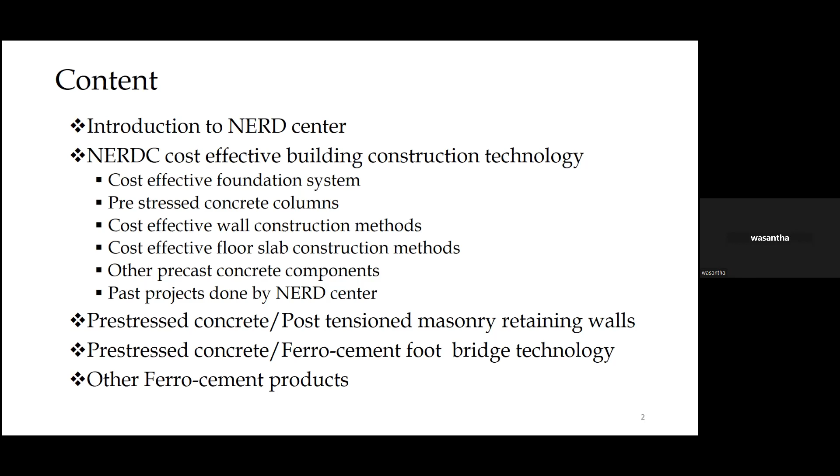Other ferrocement products - shall we move one by one? NERD Center, it is commonly known as NERD Center, but its full name is National Engineering Research and Development Center of Sri Lanka. It was established in 1974 by Industrial Corporation Act, and is presently located at Industrial Estate, Ekala, Ja-Ela.

Our total workforce, including skilled and unskilled laborers, is around 300, and we have nearly 40 plus engineers in all disciplines of engineering. We are now under the Ministry of Education.

We move on to cost-effective building construction technology. We have an entire system with introduced alternatives, and some of these techniques were introduced by late Dr. A.N.S. Kulasinghe, who was the chairman at NERD in its beginning. After that, some engineers who joined NERD Center added more technologies.

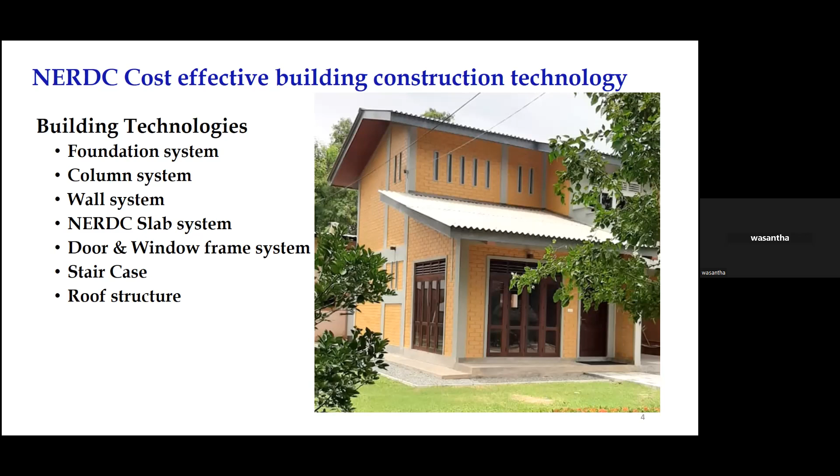As an alternative, we introduce a small plinth beam resting on the ground and spanning between columns. Above that, we construct a plinth wall made out of cement and quarry dust mix, in a 1:10 ratio. You can make up the difference between the existing ground level and the finished floor level with this slip-form plinth wall and plinth beam. This is the foundation we introduced.

The size of the plinth beam varies depending on the ground condition and the load of the wall, etc.

This is the drawing of a foundation. You can see this foundation plinth beam rests on these two columns and it is supported by the ground. In this case, it is 4-inch height. We construct a plinth wall on top of that with cement and quarry dust to make the relevant floor level height. This is the foundation we are talking about. Then we don't need excavation in this area between two columns. We can eliminate excavation.

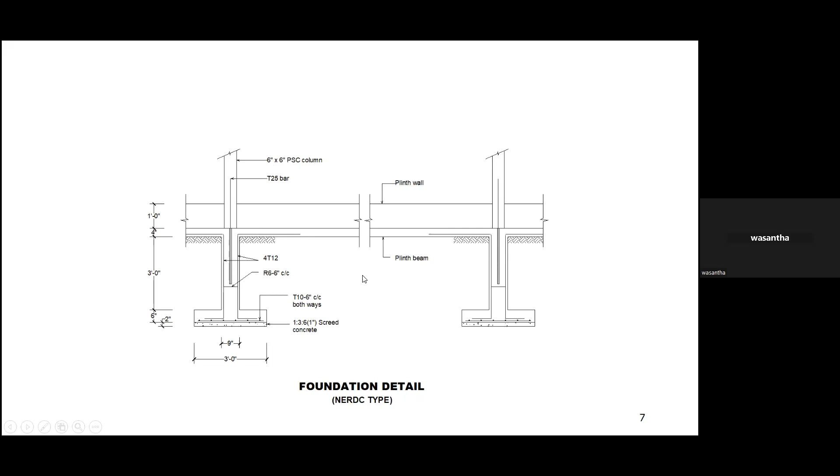These are some pictures of the foundation. This is a small building. This is another one. For this plinth beam, you can introduce a reinforced concrete beam as well. If you consider the uneven settlement, etc., you can design for that. And the same thing we can use for the foundation, and you can construct the plinth wall on top of that.

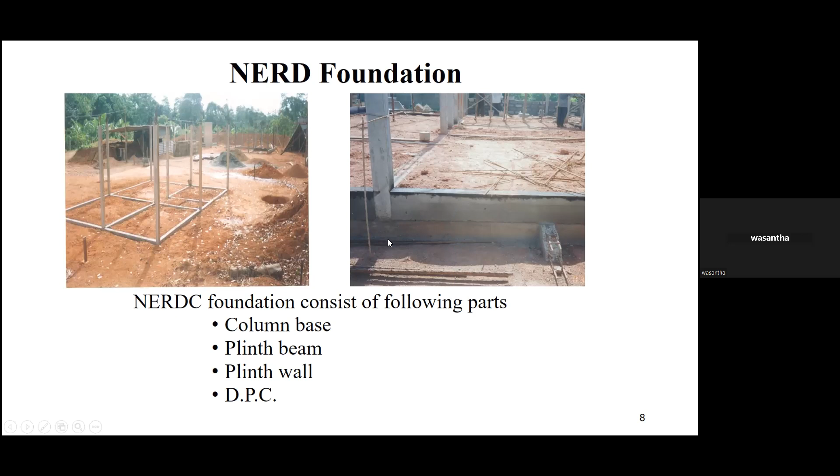This is the foundation introduced by NERD Center, and these are some pictures. This is a column excavation and you can see the reinforcement ready for the plinth beam. This is how we put the plinth beam. Here we have used 2 numbers of reinforcement, and on top of that, this is the plinth beam. On top of that, we construct the plinth wall. This is reinforced concrete. This is 1:10 cement and quarry dust wall, we call it plinth wall.

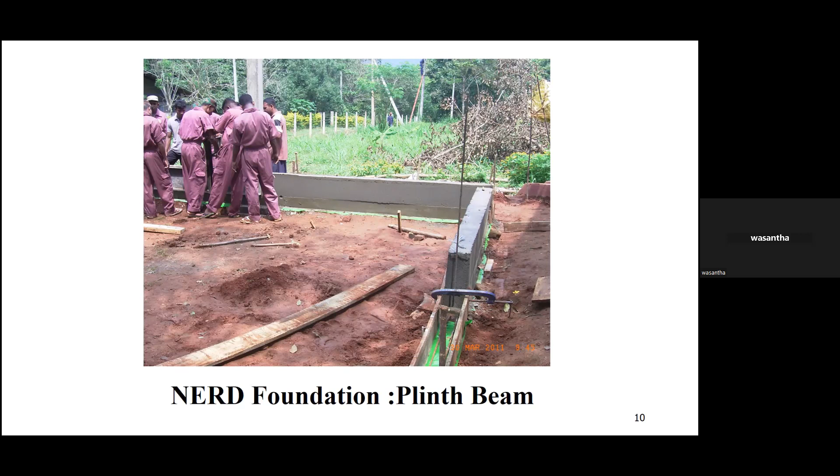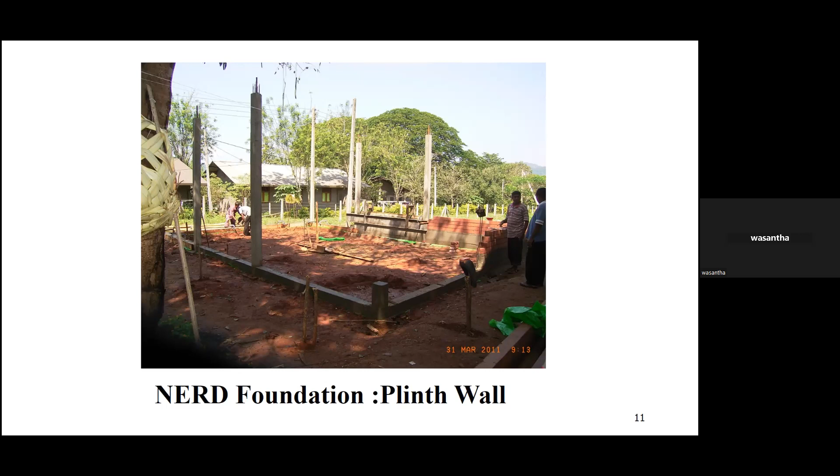This is a foundation during construction. The limitation of this foundation is you can go up to a maximum of 1.5 feet. That means if the level difference between the existing ground level and the finished floor level is more than 1.5 feet, you have to go for the traditional technology, because this slip form plinth wall cannot resist the lateral force given by the soil.

Instead of traditional reinforced concrete columns, we have introduced pre-stressed concrete columns. Actually, these columns are not fully pre-stressed, they are partially pre-stressed. These columns are made out of grade 40 concrete. If you are using pre-stressing, the minimum grade you can use is grade 40 - it is given in the code as well, the BS code. We produce columns of sections 4 by 4 inches, 5 by 5, 6 by 6, and 8 by 8.

We can produce even bigger sections, but the problem is handling is difficult. Most of these precast concrete components we handle with manual labor. These 6 by 6 columns we can erect with the help of 5 or 6 laborers easily. If you use a boom truck or excavator, you can erect even 40-50 columns within a day.

These columns have connection arrangements - connection to the foundation and connection to the next level column. I will show you by pictures. These are the connecting arrangements. In one column at the top, we put this 25 millimeter tor steel bar. In the other column, we put a 32 millimeter GI pipe, and we fill this GI pipe with cement paste and fix the column. This is the fixing arrangement at foundation level.

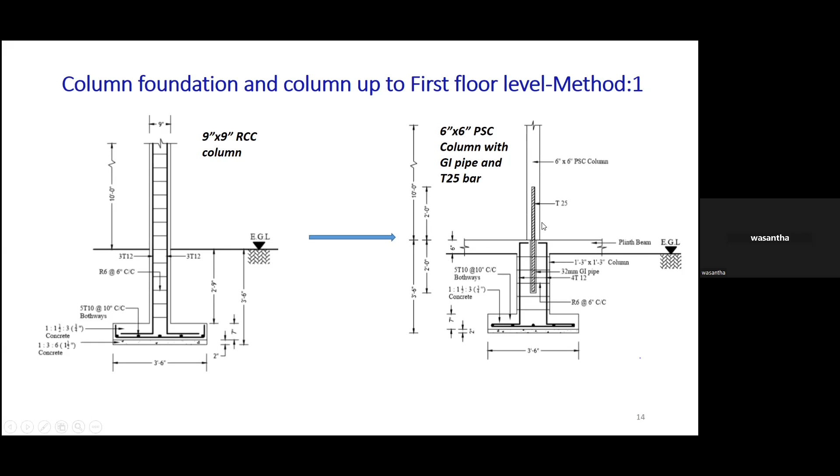This is one method. This method is suitable if the ground level is not flat. You can make all the columns up to ground level with this in-situ column, and you can fix the prestressed column on top of that. Then you can eliminate the ground differences. But this is a little expensive because of this 25 millimeter tor steel bar - tor steel is very expensive. So this method is more expensive than method 2.

This is method 2. Here we don't use this tor steel bar. What we do is we cast the in-situ concrete base and we place the prestressed column on the base like that. This is the prestressed column.

It is on the base, and we concreted it using reinforcement coming from the base like normal column and shear links, and we insert the prestressed concrete column, and concrete this stub column.

This is method 2. Depending on the site condition, you can use either method and do the construction. This column, 6x6 columns, can withstand axially near 225 kilonewtons,

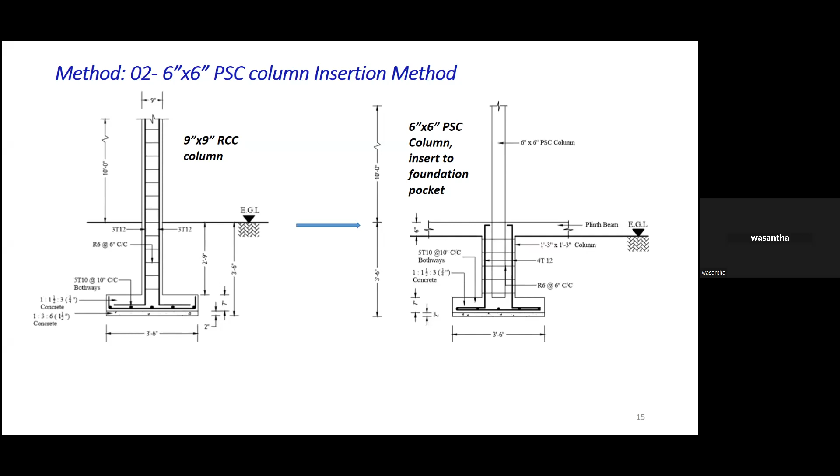and 8x8 column can withstand 400 kilonewtons. These 4x4 and 5x5 columns are used for small single-story construction, small water tanks, etc. If your loads are higher, you can go for higher sections, but the problem is handling. If you have machineries, then you can manufacture columns with higher sections.

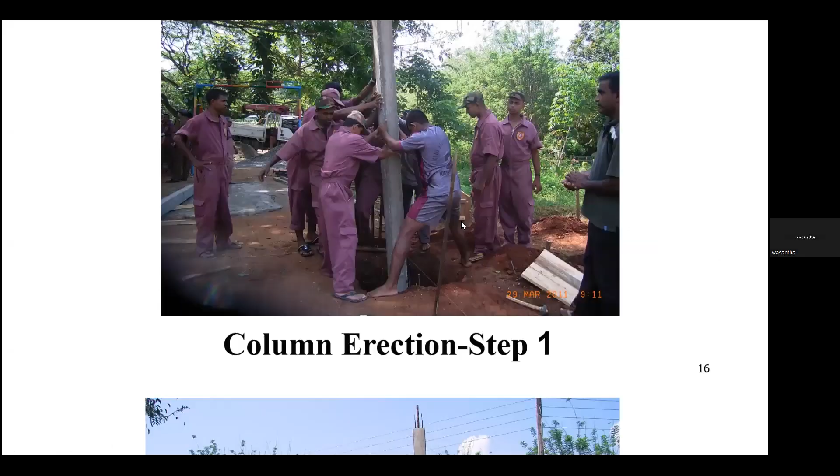This is the column erection. We make the concrete footing and put the reinforcement for stub column and place the column in line and in vertical way. Then fix some support, and you can concrete using this formwork.

Then following day, you can remove the formwork and the column is completed. Like that, you can erect all the columns of a building within one day. And these columns are cheaper, over 30% cheaper than the traditional RCC column.

Since these columns are manufactured at a prestressing yard with good supervision, the quality of the column is high. When we do construction at site, there is no supervision most of the time, and there are honeycombs and verticality issues. There are a lot of issues. You can eliminate most of these issues with these columns, and these columns are durable because they are all made out of grade 40 concrete. Normally we use grade 25 or grade 20 for RCC construction.

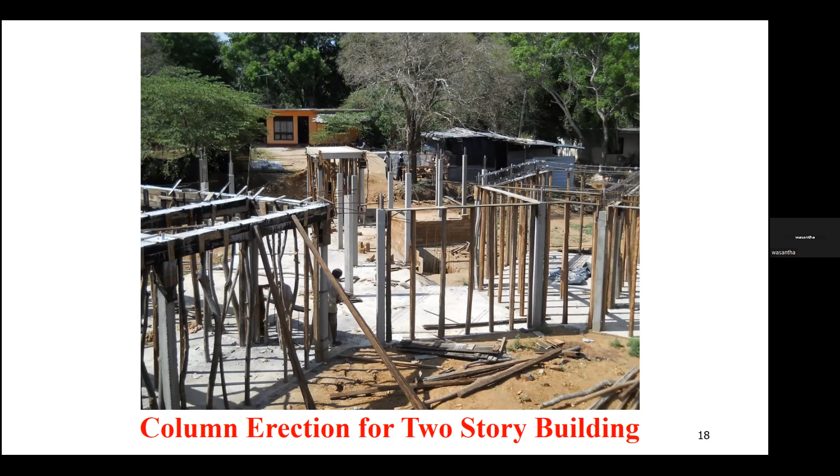And cost-effective wall construction methods. NERD Center introduced 2 wall construction methods at commercial level. There is another construction method not yet introduced to the commercial level. I discuss only the commercially available technologies.

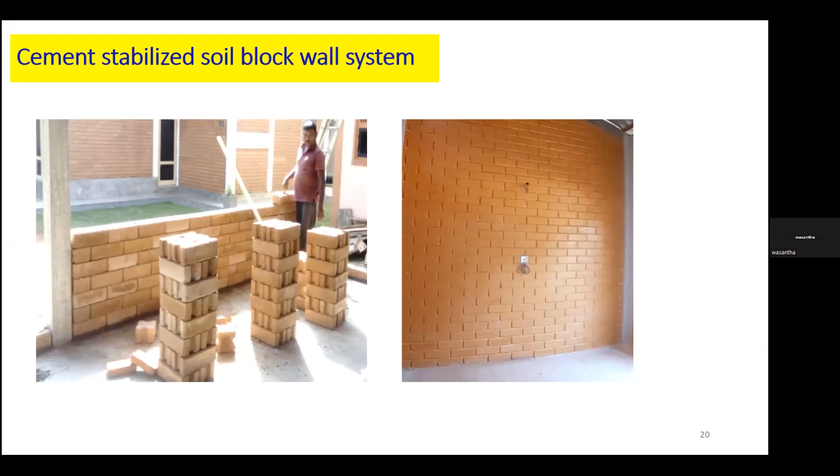The first thing is cement stabilized soil block. There is an SLS standard also for this block. The advantage of this wall construction system is it uses minimum amount of sand, sometimes no sand. In this soil block wall, no sand is used, only soil is used, and these are interlocking blocks. Then you don't need mortar to make the wall as well.

First thing is you have to select a good soil. For this soil block manufacturing, mainly you need gravel soil. If your soil contains more than 60% of coarse sand and gravel, and content of silt and clay is less than 40%, that type of soil is suitable for manufacturing cement soil blocks.

You can use a simple test, this bottle test. What you have to do is put the soil sample at half level of the bottle and shake it well and keep it to settle for 24 hours. Following day, you can see at the bottom the gravel, above that the coarse sand, silt, clay, and water. Then you can measure the height of these individual layers and calculate the percentage.

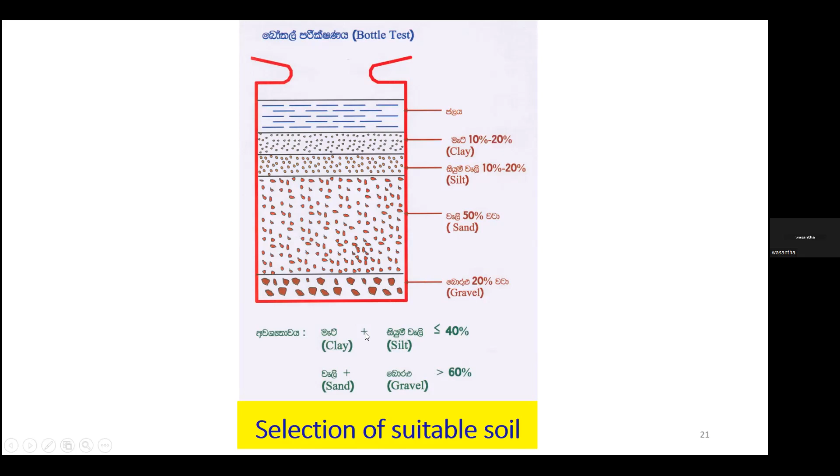If it satisfies this equation, then that means this soil is suitable for manufacturing cement soil blocks. Normally, simply gravel soil is suitable. For clay particle size distribution, clay is what we consider less than 0.002 millimeter, silt between 0.002 to 0.075, sand 0.075 to 5, gravel 5 to 10.

To manufacture these soil blocks, we have to sieve this gravel soil. We have to sieve using a 6 millimeter sieve. That means if the particle size is more than 6 millimeter, the finishing is not good enough. These are manual, normal sieving methods, and there are some mechanical methods also.

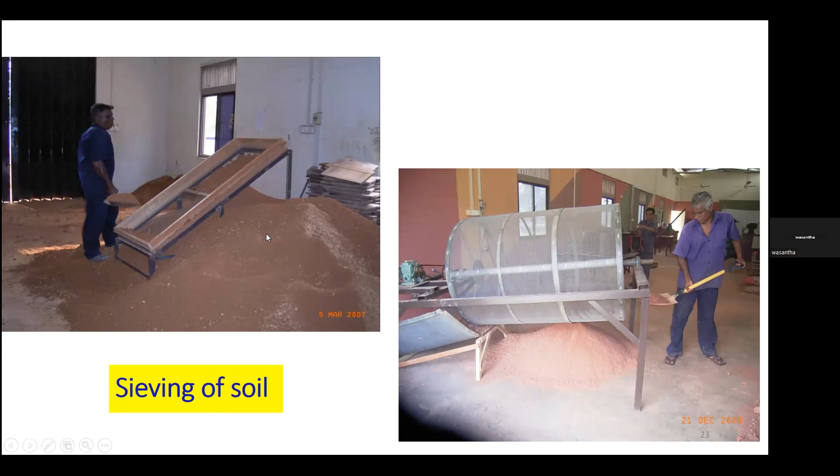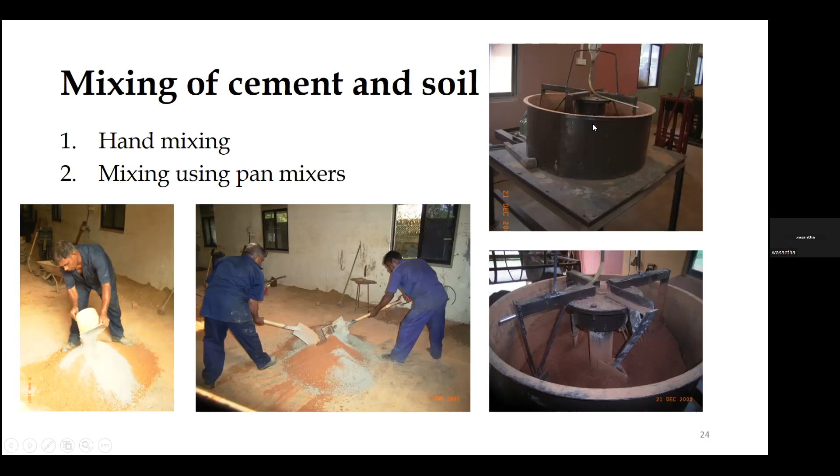You can use either method and prepare your soil, and you have to mix it with cement. Normally, there are 2 machines. We use 1:10 to 1:15 ratio. These are manual methods of mixing and automated methods also. You can use either method.

And when you are adding water, you have to be careful. You can't add water like cement, sand mortar. We use this flower bucket to add water and mix well. Otherwise, it will not properly mix.

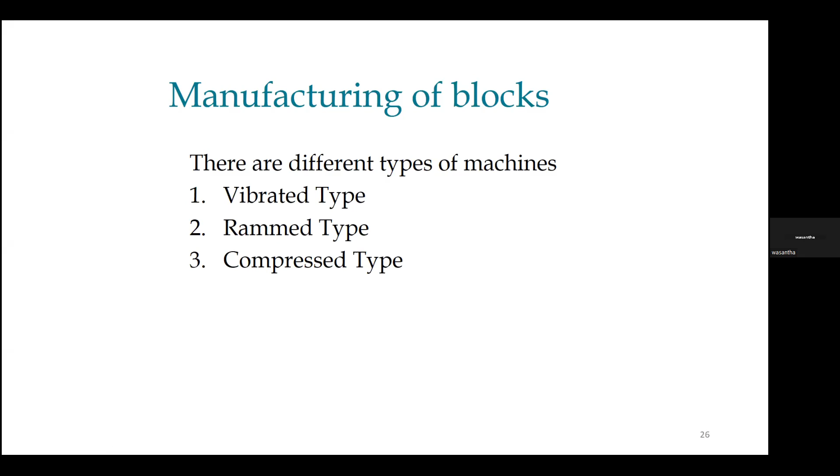And then you have to manufacture the block. There are different types of machines we have introduced. Vibrated type means the normal block making machine. Rammed type machines are specially introduced for manufacturing of these blocks, and compressed type blocks.

This is a normal block making machine. You can produce blocks, but the problem is the finish is not sufficient to keep it exposed. You need to plaster it, but still it is cheaper because sand or quarry dust is replaced by soil. Since soil is cheaper than sand, these blocks are cheaper.

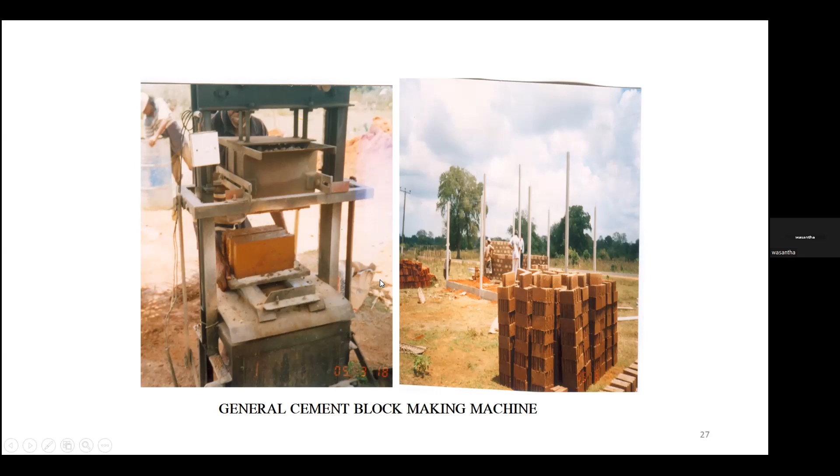We introduced this system for the North and East housing rehabilitation project. This is one model house constructed near Omanthai. This is in 2005, I think.

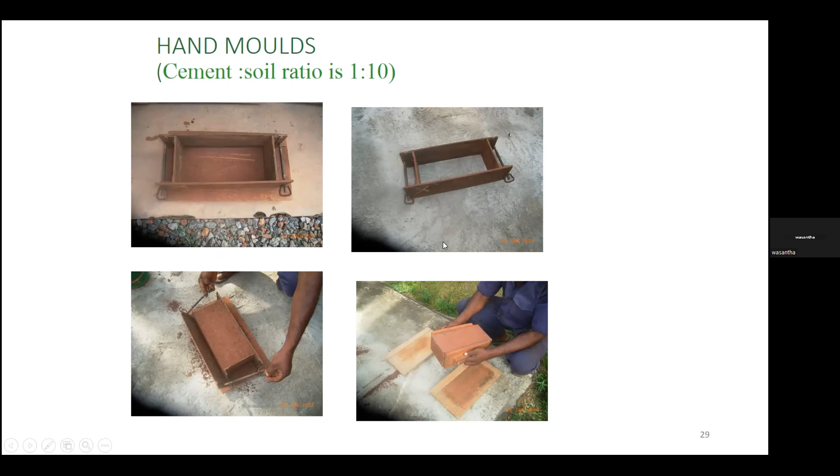Using these hand molds also, you can manufacture these cement soil blocks. You have to use a 1:10 ratio because the compaction is low compared to hydraulic machines. If you have your own construction, you can use this type of hand mold. This is another type - two C channels and timber dividers - and using this equipment you can manufacture soil blocks easily.

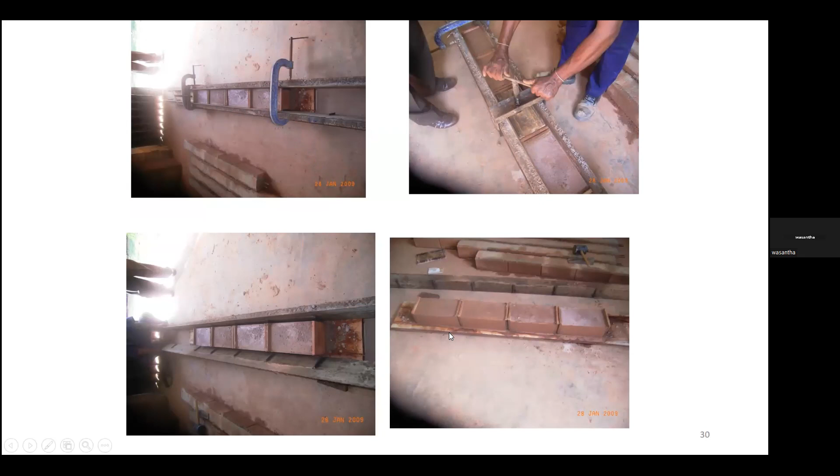There are some compressed type machines. We have introduced some machines. You don't need electricity for this type of machine. We can produce 300 to 500 blocks per day. Plastering is not necessary - blocks have a good finish, only manpower is required.

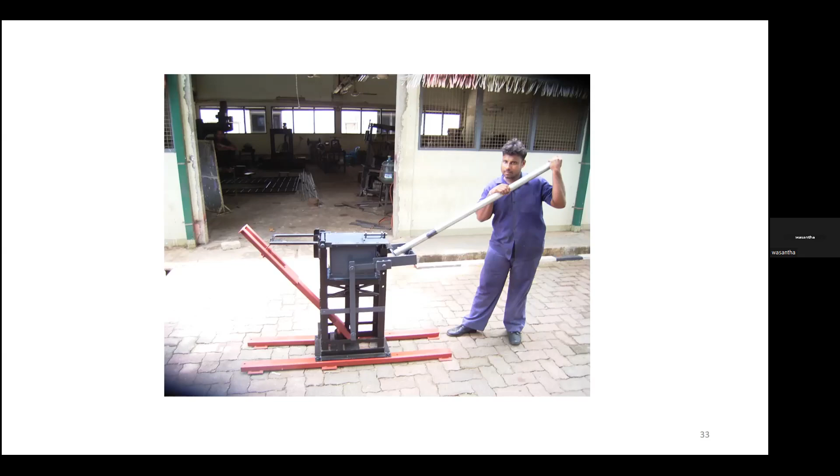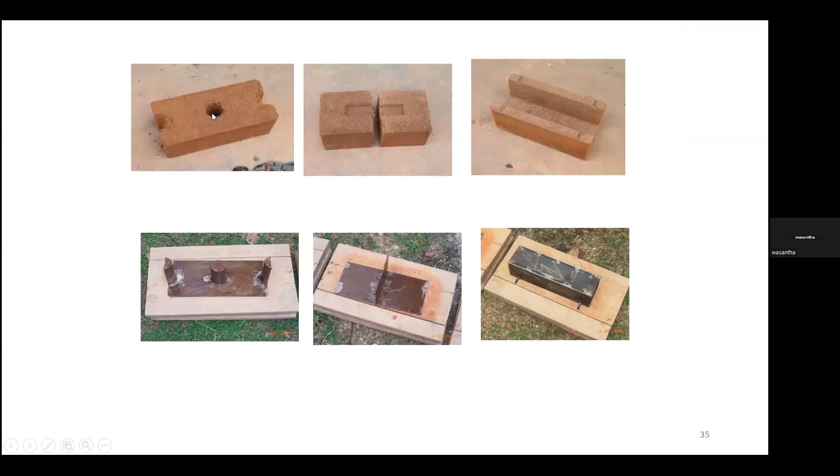If you wish to manufacture soil blocks as a business, the best thing is to go for a hydraulically operated compressed block making machine. Then you can use the cement-soil ratio of 1:15 - earlier machines you had to use 1:10, but now with this machine's high compression ratio, you can use 1:15, which is cheaper. With this machine, 180 blocks can be manufactured per hour, and the finish of the block is very good.

Easy operation - 2 blocks can be produced at a time. This is the machine. We have 10 to 15 registered manufacturers all over the island. Some manufacturers have the capacity to fabricate 5,000 blocks per day - Lanka Ecobricks and several others have such capacity.

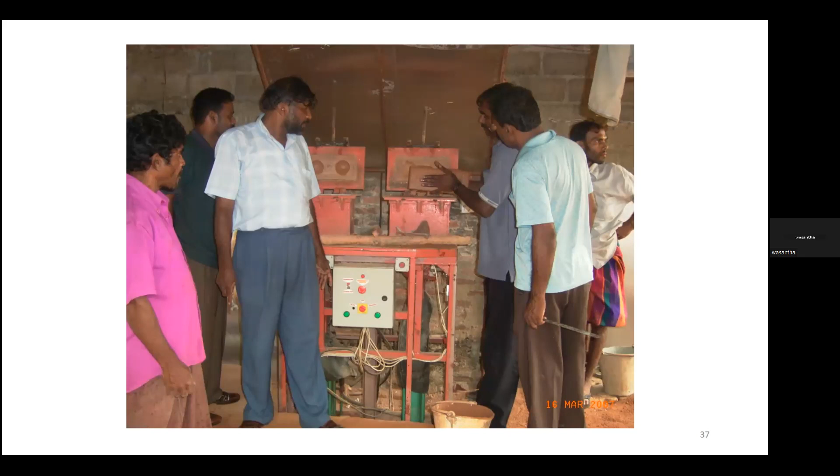This is one of our registered yards. They have enough stocks. Nowadays the construction industry has some problems, and they are also facing the problem of selling these blocks.

This is a house constructed by the owners - they manufactured the blocks and constructed their own house. This is another house with soil block.

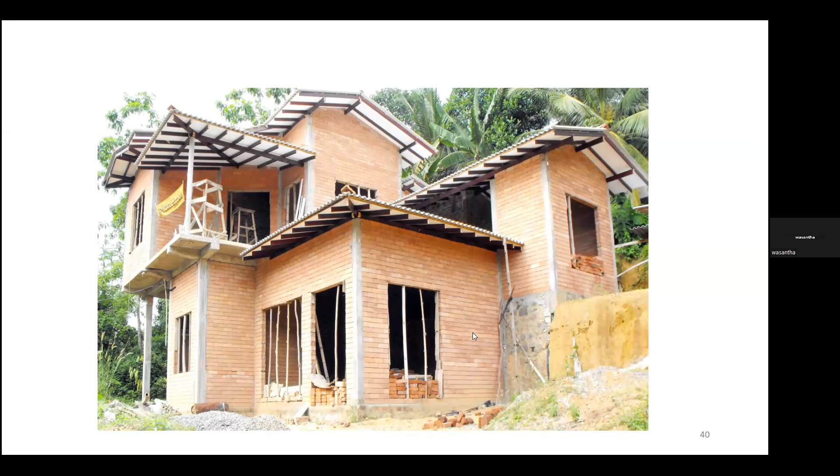This is the building at NERD Center, our business development center. There are some model houses also constructed at NERD Center. If anybody wants to have a look at these houses, there are a few model houses there. Anybody can come on a weekday and visit these buildings.

Advantages: these blocks don't need sand, so it's a solution for the sand crisis and environmentally friendly because sand mining is minimized. Soil is freely available, with less transport problem compared to sand. There's also a comfortable environment inside the house because heat transfer through this soil block is minimum.

The technology is simple. A significant amount of cost can be saved, and it will create new employment.

The next wall system is the slip form wall. This was introduced by Dr. Kulasinghe in the 1980s. At the time of introducing it, quarry dust material was a waste from the quarries. Then he introduced this wall construction method. This is actually a load-bearing wall.

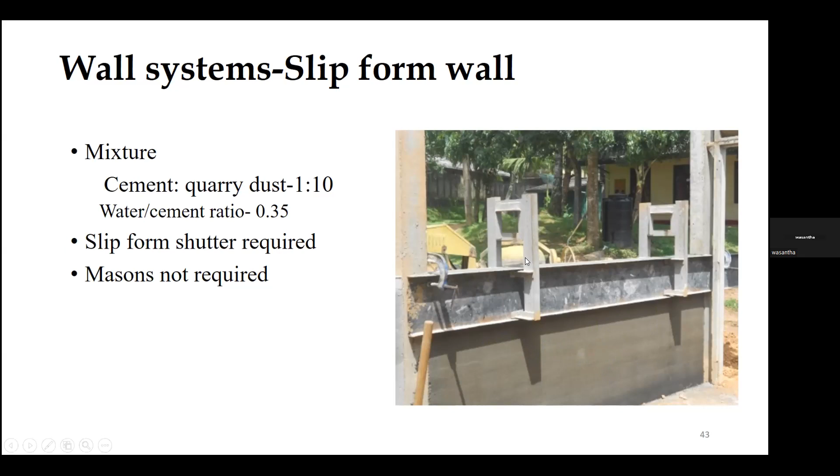You don't need a mason to construct this wall - here you need the slip form shutter. Slip form means this shutter is made out of steel, and there are two brackets like that. The shutter is put at the bottom like that, and we fill the inside with a cement and quarry dust mix at 1:10.

Using this ram, we compact it. Using these two hydraulic jacks, we place the jack here and lift the shutter, then fill the shutter again, compact again, and lift again - like that, you can continue the wall up to the top.

This allows continuous construction - you don't need to wait after constructing 5 feet like that. You can complete the wall even if your wall height is 15 feet, it doesn't matter, you can continuously construct. If there are openings, like a window or door, you have to keep the frame inside the shutter, and follow the same procedure on both sides.

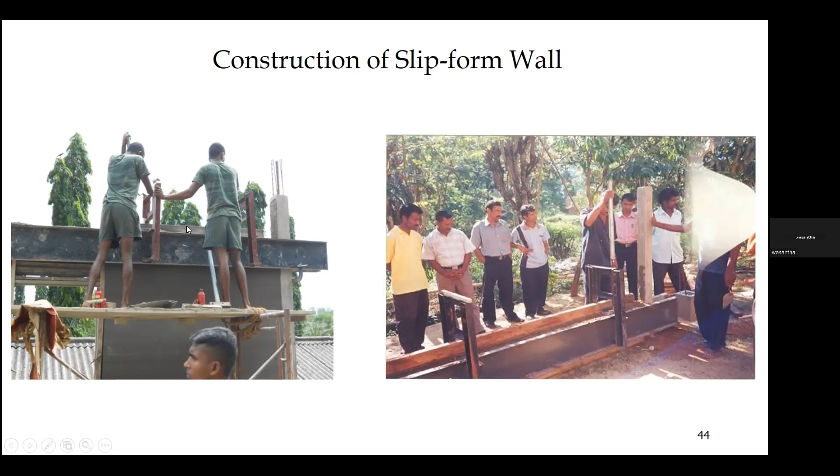Then you can do it like this. Here you can see the window frame is placed, and the two sides we fill with this mix. And if you need the lintel, you can cast the lintel with the same shutter. Like that, you can complete the construction at the top. If you need a tie beam or something, you can cast the tie beam using the same shutter, and the following day you can remove the shutter.

The advantage of this one is this is not a block by block making method. The entire wall is like a single block. Then you don't need to plaster. You can directly apply lime putty or skim coat or something. You can apply and get a smooth finish, like a finished plastered wall. And that is for the inside. Outside, you can just directly apply the weather shield paint and this filler or waterproofing seal or something.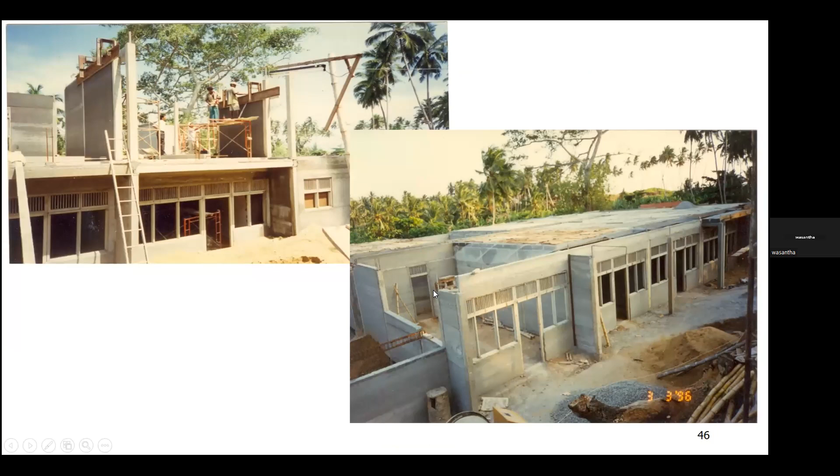Then in this one also no sand is used. The earlier one is cement and soil. This one is cement and quarry dust. In both these wall construction methods, you don't need plastering. That means with this wall construction method, we have eliminated plastering. You can save sand. These are some buildings we have constructed. But nowadays, the cost of this quarry dust is a little expensive, but still it is cheaper than the sand, and still this technology is viable. We will use this technology still in our projects.

And in slab construction also we have introduced some technique. It was introduced by Dr. Kulasinghe and later modified by some engineers. With a traditional slab system, if you design an RCC slab and apply the deflection control, the slab thickness is around 5 inch, and you need a lot of formwork and supports and a lot of reinforcement. As an alternative, we have introduced this slab system. Here we use precast concrete beams at 2 by 2 feet interval and a plywood formwork or ferrocement panel and no steel reinforcement, only a 2 by 2 GI mesh and 2-inch thick in-situ concrete topping. Then you can have this type of slab.

It is also cheaper. There are two systems. One is with the plywood. This is a ferrocement panel, a permanent panel. I will explain both. In this system, you have placed precast concrete beams at 2 feet interval and 2-inch thick in-situ concrete topping. These beams are pre-stressed with 3 number of 5 mm high tensile steel wires. Each wire is tensioned to 20 kN and grade 40 concrete is used. For the in-situ concrete topping, we use gauge 10 2 by 2 GI welded mesh.

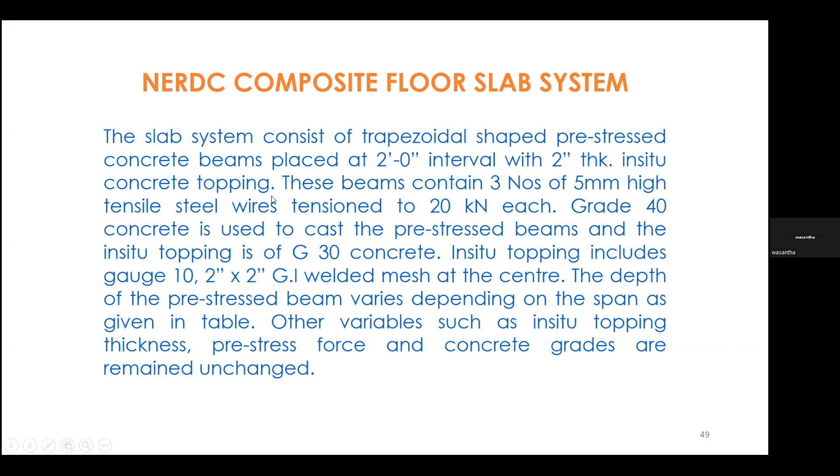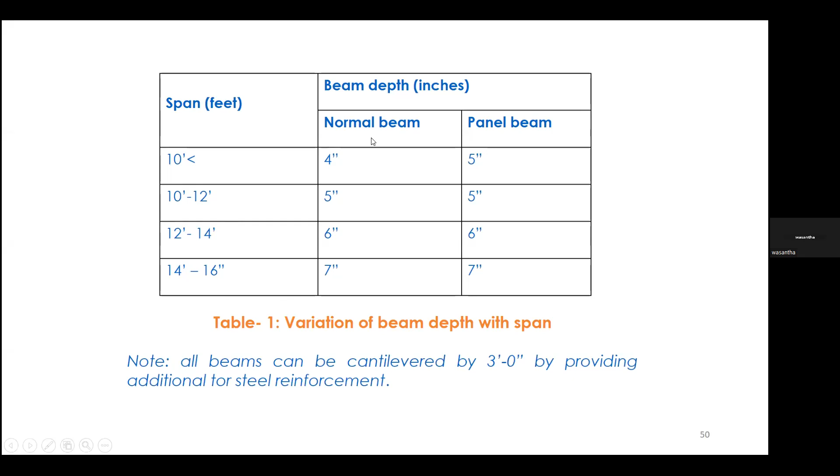And the beam depth varies depending on the span. We have a small mistake. Maximum span you can have with this slab is 16 feet. That means if your panel size is 16 by 100, it doesn't matter. You can have a 7-inch deep beam and you can construct the slab. This is one slab system. Actually, this is the system introduced by Dr. Kulasinghe. These are pre-stressed beams at 2 feet interval. This is the in-situ concrete topping. At the center of the in-situ concrete topping, we have a 2 by 2 GI welded mesh.

But the problem is you need a plywood formwork here. The house owners faced some difficulties in finding this plywood formwork, and later other engineers introduced a ferrocement panel here. The beam is made with a small groove like this, and we place the panel here, and we put the in-situ concrete. This method is easier than the earlier method, but more expensive. In the earlier method, plywood can be reused. This ferrocement panel is a permanent formwork. It cannot be removed after you place the in-situ concrete topping.

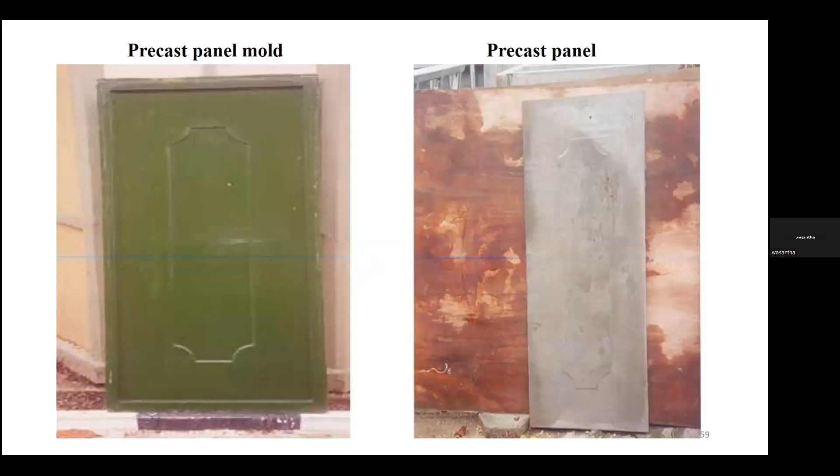These are the two methods introduced by NERD Centre. Actually, this slab is designed in accordance with the clauses and guidelines given in Chapter 5. These are some pictures. These are the beams. This is the in-situ concrete topping. These are the ferrocement panels. We use these fiberglass molds to manufacture these panels. These panels are made out of ferrocement. Ferrocement means cement and sand with some mesh. Here we use gauge 18 1 by 1 inch GI mesh.

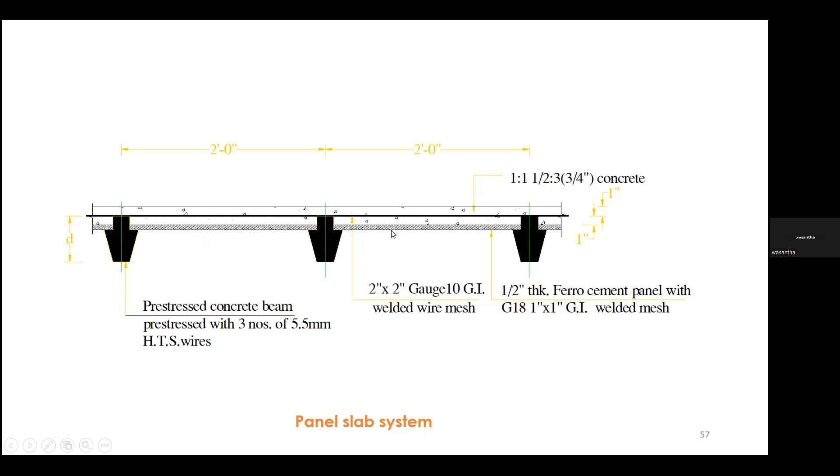This panel is there only to keep the in-situ concrete. This panel is not a structural element. It is a permanent formwork. After the concrete is set, this panel is not required, but we cannot remove it. Then we have a design at the underneath of the panel, so you can have this type of finish. There are some plain panels as well. Advantages of this NERD composite floor slab system: actually, this is a composite system of pre-stressed concrete beams and in-situ concrete topping.

The advantages: considerable reduction in weight. You know, in a 5-inch thick RCC slab, the unit weight is 3 kilonewtons per square meter. In this slab, the self-weight is 1.8 kilonewtons per square meter. So, significant reduction of self-weight.

Then you can reduce the foundation as well, because the self-weight is one of the most significant weights when you consider the foundation. With this reduction, you can reduce the foundation cost as well. Then no propping is required. If you put the normal slab, your props cannot be removed until 28 days.

With this one, since there are no props, the following day you can start the internal finishes of the room. And this is cost effective, it saves material. These are the advantages. Few limitations: this pre-stress technology needs special knowledge. These beams can be supported only in a simply supported manner. And it requires pre-stressed beams.

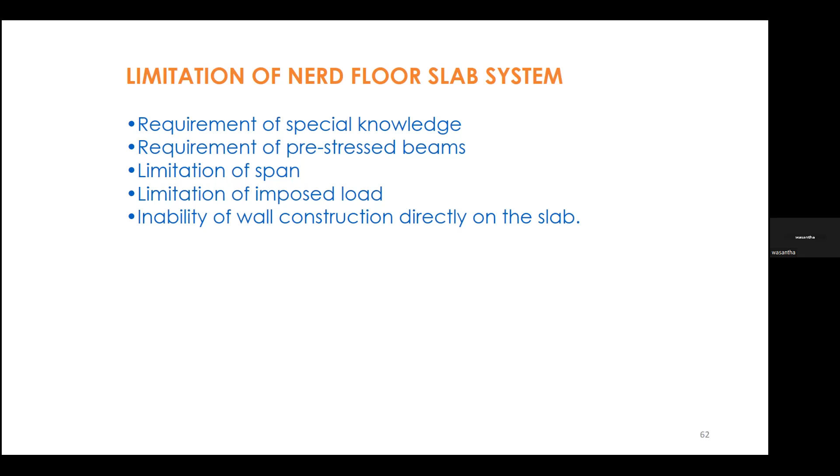Then other precast concrete components. This is very familiar now, concrete door and window frames. First introduced by NERD Centre, now it is very common everywhere, so I won't explain it further. And staircases are very expensive; the labor cost is expensive. We introduced this precast concrete staircase. There are two stringer beams and L-shaped steps. With this arrangement, you can fabricate this type of staircase fully precast, and very cheap, over 40% cost saving.

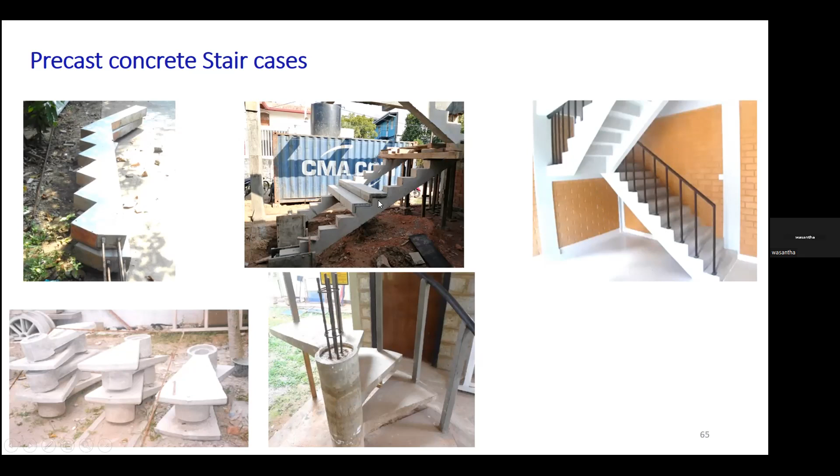And there is a spiral staircase also. This is not good for the main staircase of the building. It is good for a fire exit or as an additional staircase. But the stringer beam and L-shaped steps one is suitable for the main staircase of the building. And we have roof trusses. These are 50% cheaper than steel trusses. The maximum span you can have is 40 feet. These trusses are pre-stressed.

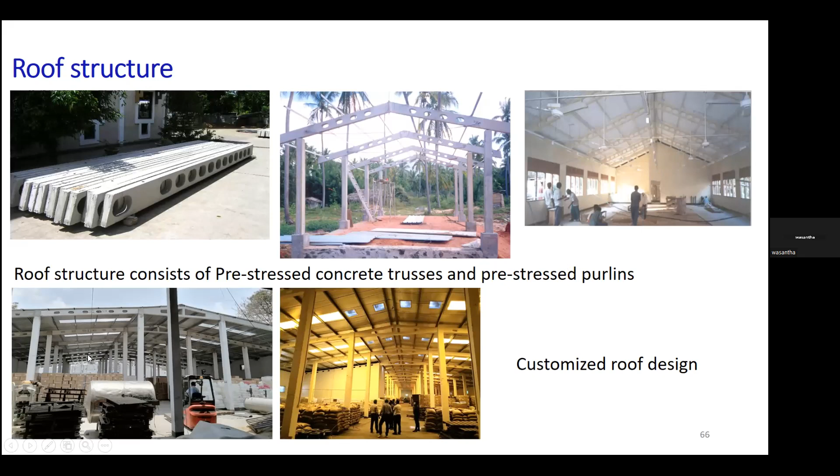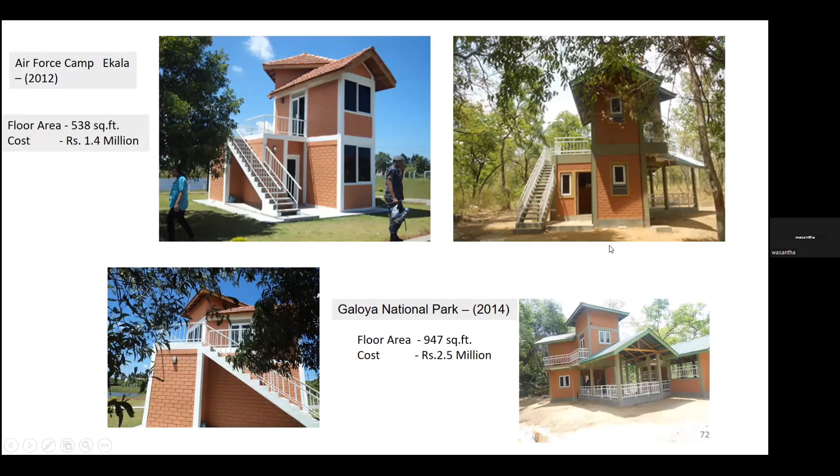And Vidatha centers, we have constructed a lot of Vidatha centers. Almost all Vidatha centers in the country were constructed using that technology: Haliyala, Pannala, Giriyala, Madampe, Hadawata, Sandilipay, Nallur, Sainthamaruthu. This is in the North Province. And this is one building we constructed at Ekala Air Force Camp. This is a National Park quarters building. All our technologies are used here.

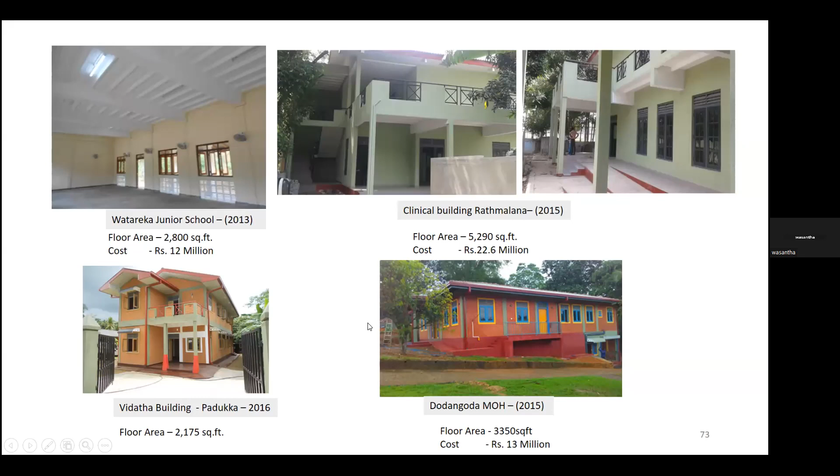And this is another building we completed in 2023, at the Faculty of Indigenous Medicine, Rajagiriya. This is a lecture hall building. Here also we use a combination of normal RCC columns and pre-stressed columns because the lecture hall imposed load is higher. Our pre-stressed concrete columns cannot withstand these loads, so we use in situ concrete columns, and our slab, soil block and roof trusses are used here.

The stringer beam and L-shaped step staircase is also used. Here we completed only up to the third floor because their budget is limited, and the project cost is 69.6 million with price fluctuation. We started this building in 2021 during this crisis, and we completed it recently.

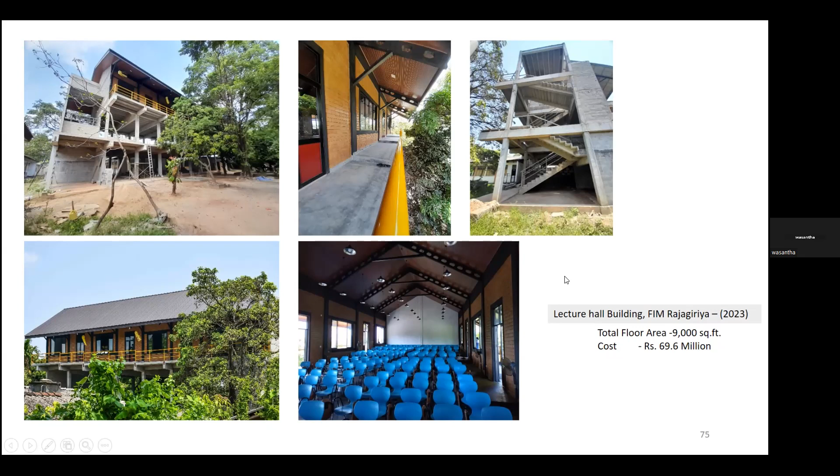And in our estimate, the first estimate was around 47 million, and we ended up with 69 because of this price increase. And now it is handed over as the lecture hall, and lectures are conducted here now.

And we introduced pre-stressed concrete retaining walls instead of traditional retaining walls. Traditional retaining walls are made out of rubble masonry or reinforced concrete masonry. And this is the system we introduced. These pre-stressed concrete wall panels are produced at the pre-stressing yard, and we put the foundation and fix this column vertically. And these columns are pre-stressed so that the lateral soil pressure can be handled by this pre-stressing.

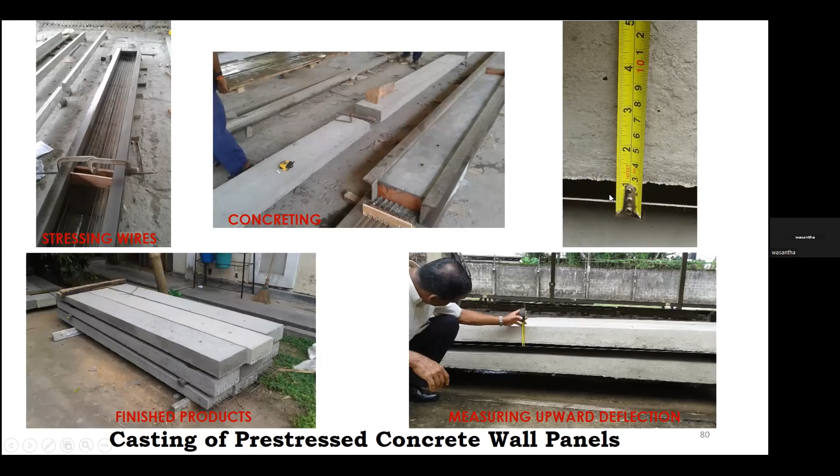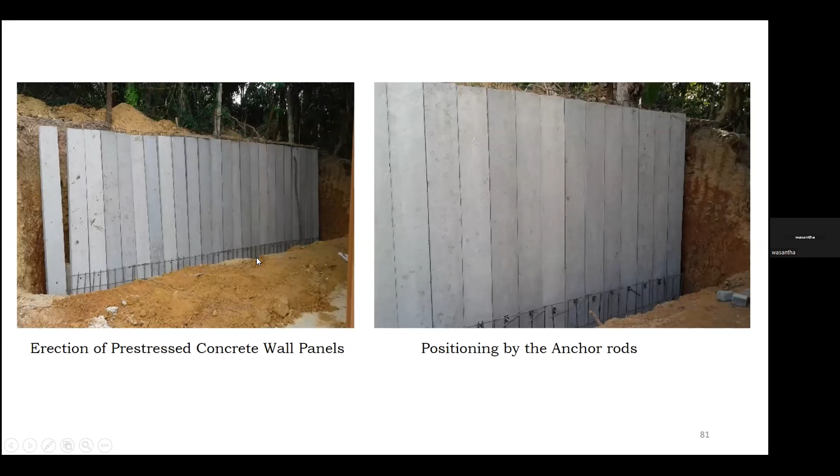And we place the panels, and we fix the panels with this anchor bolt to the in situ concrete wall. You see, it is below the ground level, and keep it vertical and put the formwork and concrete. Like that, we can go up to 12 feet height. The section of this column is very small, I will show. And we fill the top side and bottom side, and we check the deflection also, very small deflection. And durability is very high because pre-stressed concrete is involved.

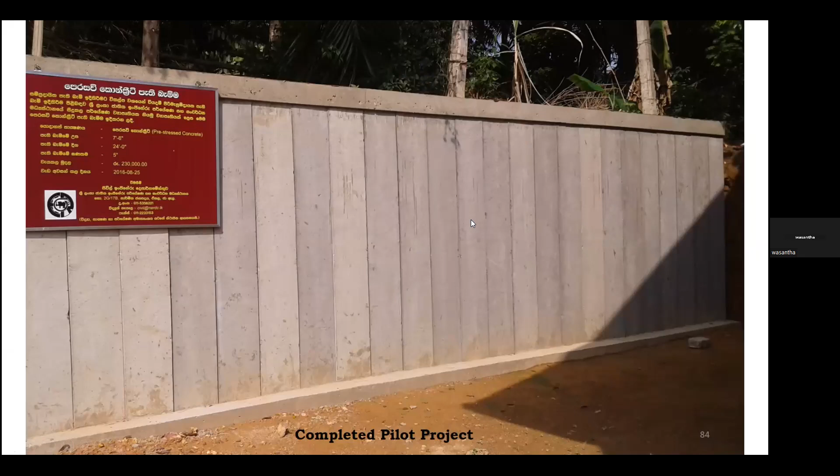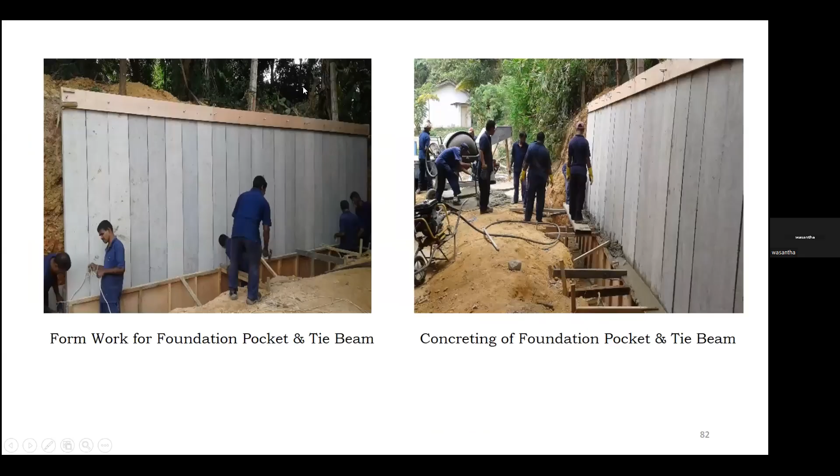This is a completed project. We have completed several projects all over the country with this pre-stressed concrete technology. These are the sections. If your height is 3.3, your panel size is 175 by 300. Here you can see top 3 inch, bottom 5 inch tapered wall panel, because the moment is 0 at the top and maximum at the bottom due to lateral pressure.

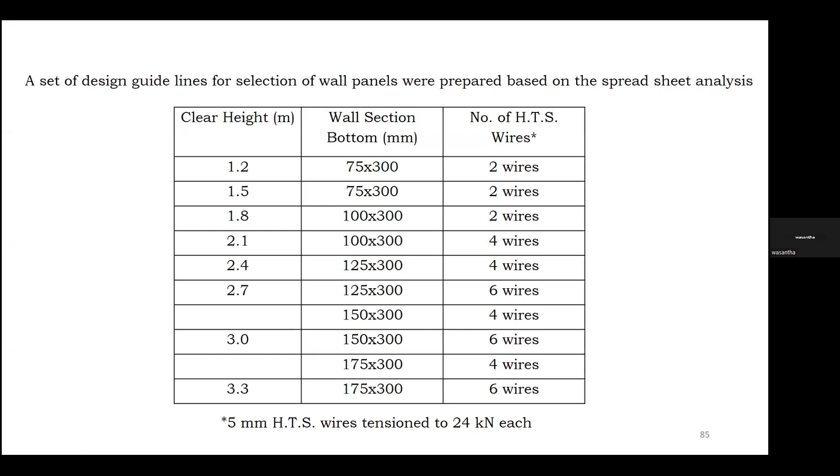And with this one, we cannot reduce cost much because concrete and steel are involved. Minimizing cost is not easy. Then we thought about masonry blocks. The problem is normal masonry blocks cannot be used because they cannot take a lot of compression. Then we have to manufacture special blocks. Normal blocks' compression is low, but if you produce a post-tensioned masonry retaining wall, you need 7 to 8 compressive strength.

Then we can manufacture this post-tensioned masonry retaining wall. We manufacture blocks at NERD. And like the earlier one, we cast the concrete footing and the wall up to ground level. And we kept holes to insert high tensile steel wires for the post-tensioning. This is the arrangement we use for post-tensioning. This is the wall up to ground level. Then we construct the wall on top. With this PVC pipe, we can make vertical holes and horizontal holes. This is to lock the pre-stressing wire.

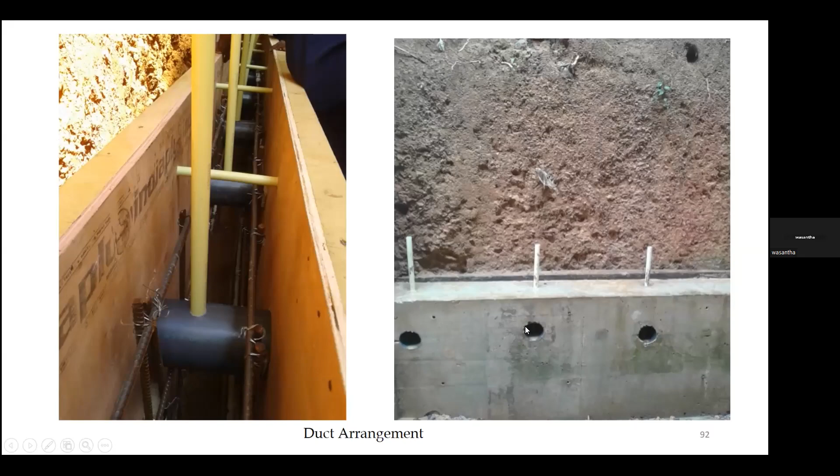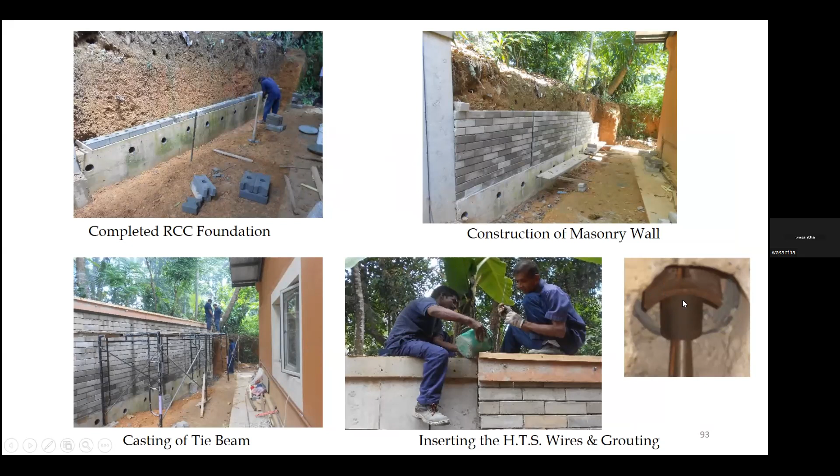And we place the blocks and we construct the wall like that. And after completing the wall, we put the tie beam on top. And there is a small 2-inch diameter hole here. And we insert the high tensile steel wire from the top and put the anchor cone and pin here and fix it like that. And from the top, we can stress the wire using these hydraulic jacks. This is on top of the wall.

And then you can pre-stress this masonry wall eccentrically, because the hole diameter is 2 inches. Then you can keep the pre-stressing wire to a side and stress. And this anchor cone and pin we cover with mortar to avoid corrosion. This one is very cheap.

But we face some problems. Our machine was developed to manufacture cement soil blocks. When we manufacture cement and quarry dust blocks with this machine, the durability of the machine is reduced. That's the problem. We still cannot solve this problem, but the technology is very good, very cheap. With this post-tensioned masonry wall construction method, no concrete is involved above ground. And this is 25 to 30% cheaper than the RCC wall.

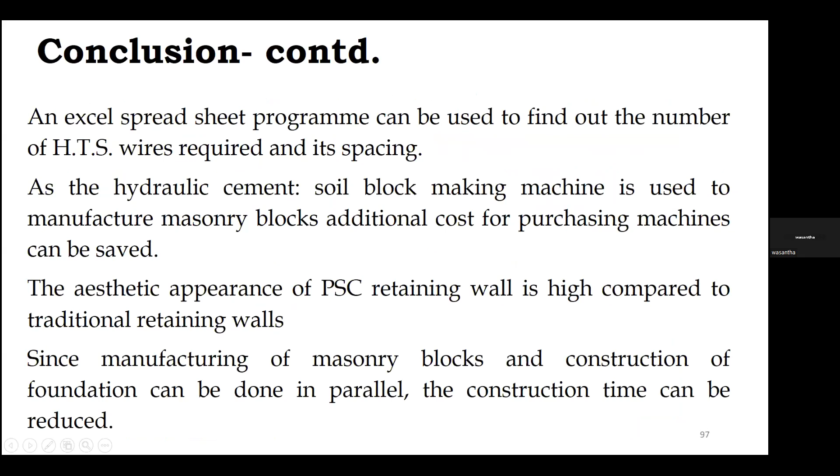This is a completed project. In addition, we have introduced footbridge technology. In Sri Lanka, there are around 5,000 places with unsafe means of crossing canals. In some places, there are no means of crossing canals at all, and they have to cross through the river using timber logs and similar methods. We did a survey in 2007 and identified over 5,000 such places.

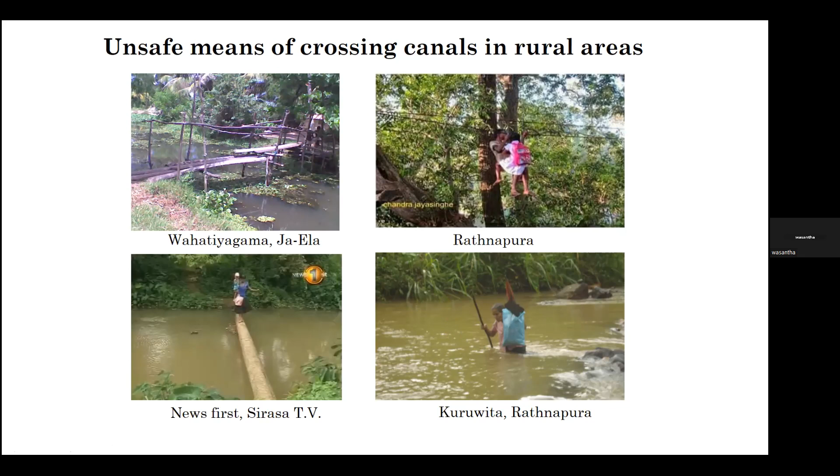Then we did research to introduce a cost-effective footbridge, and finally we introduced two technologies: one is ferro-cement technology, the other is pre-stressed concrete technology. We developed this technology so that a small lorry or van car can pass through the bridge. The maximum width is limited to 7.5 feet, because otherwise all vehicles would pass through and the bridge would fail. With this width limit, only a double cab or small van car can move; heavy lorries cannot. The maximum span length of the bridge is 30 feet.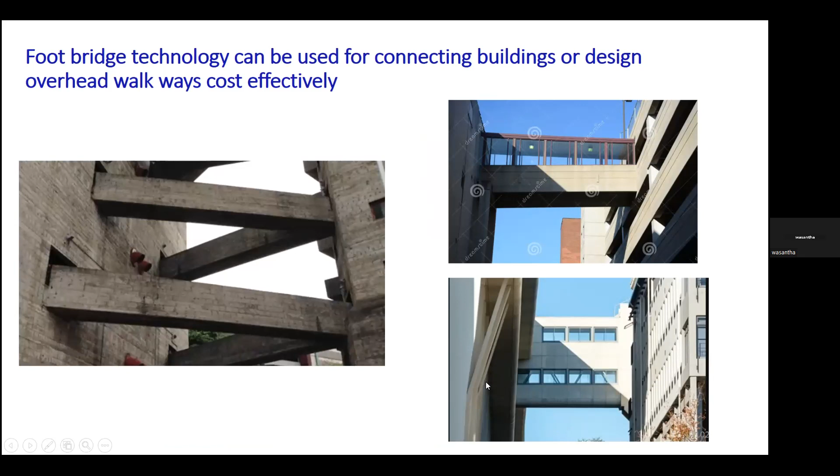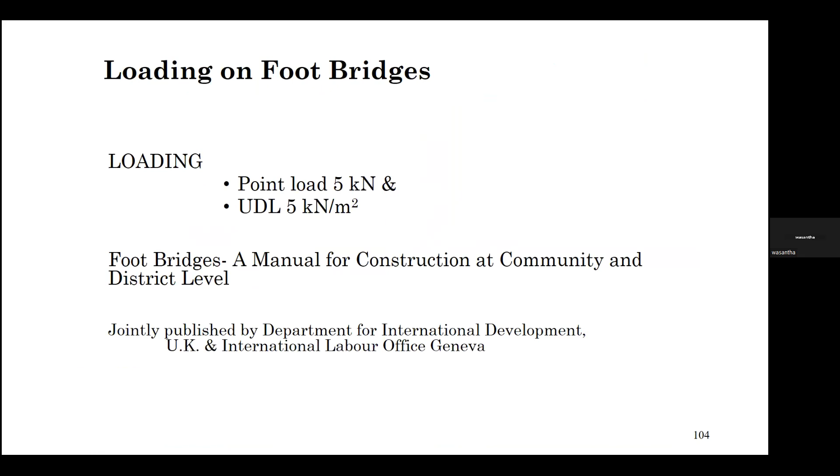Here we use prestressed. The same technology can be used to interconnect buildings, which is especially good for school buildings. If there are two adjacent four-story buildings, teachers would have to travel all the way around to reach the other building, but with a bridge like this it becomes very easy. There is also a manual for construction of footbridges with some guidelines, which we used to introduce this technology.

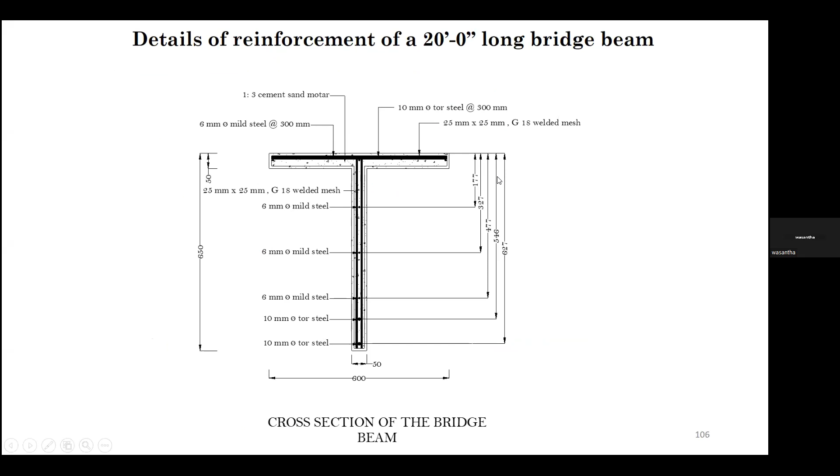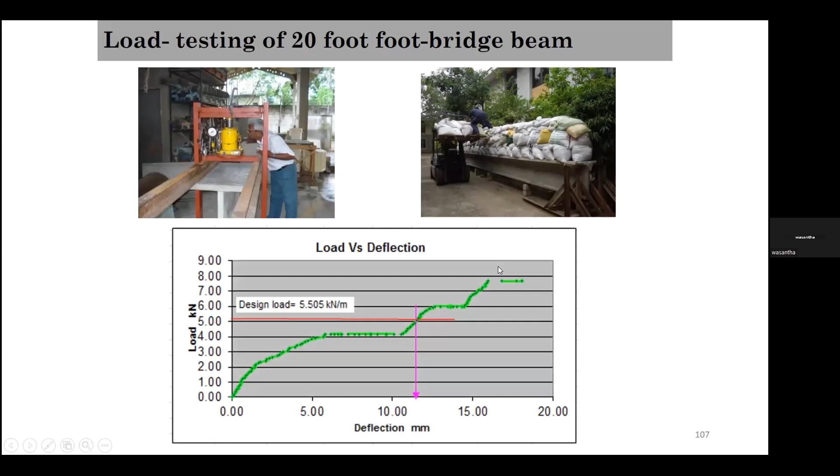The ferrocement technology is very simple, cost-effective, easily repairable, with less maintenance, a simple technique, and no machinery required. Ferrocement is a technology used with a lot of labor. This is the section of the ferrocement bridge beam, 650 millimeters high and 600 millimeters wide. We cast two of these panels, test them at NERD Centre with these loads, and construct the bridges. We also analyze using SAP.

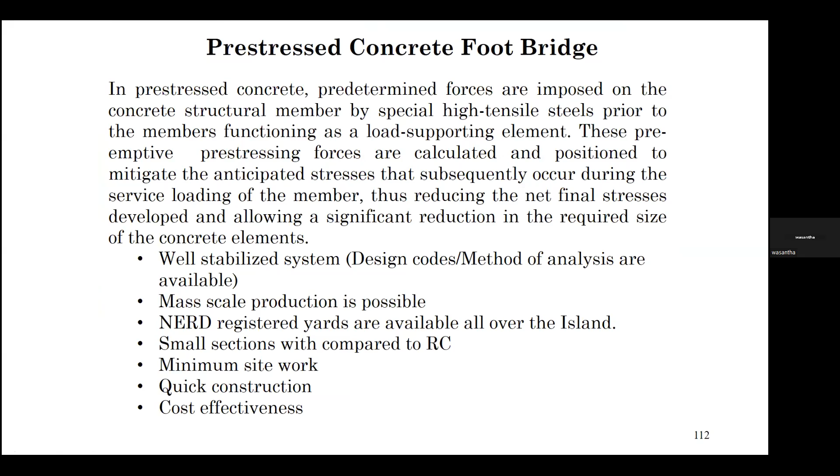Then there are prestressed concrete footbridges. Prestressed is a well-established system with design codes and analysis methods available. The NERD Centre has registered yards all over the island. The prestressed beam sections are very small compared to RC, site work is minimal, and construction is very quick, making this method very suitable for footbridge construction.

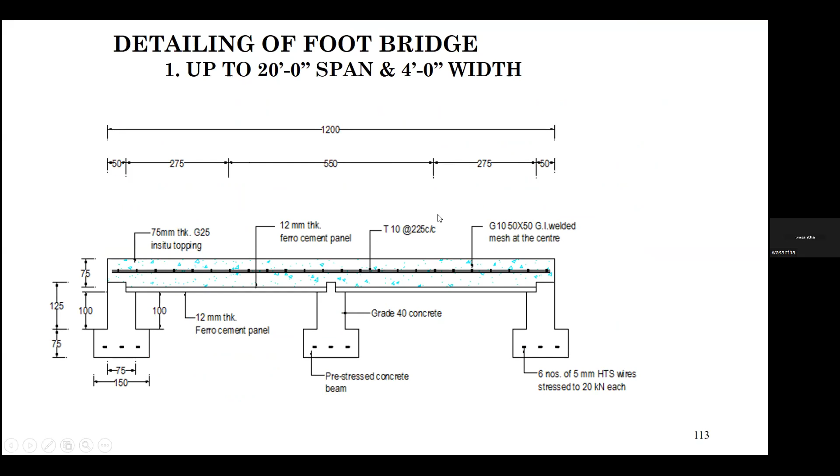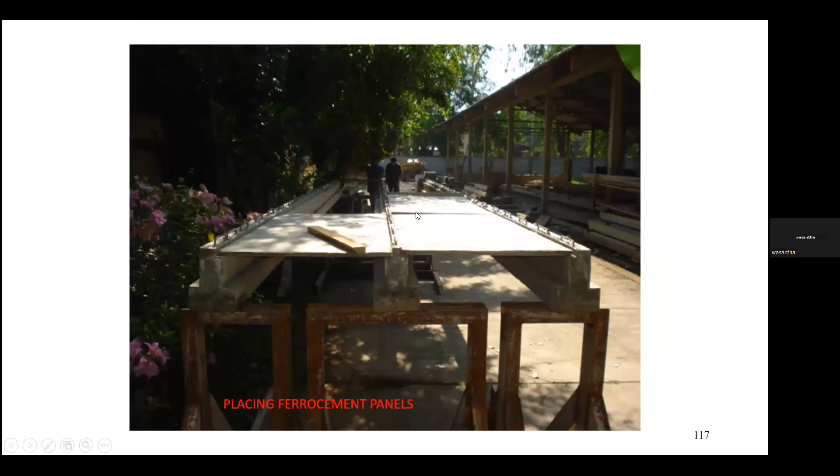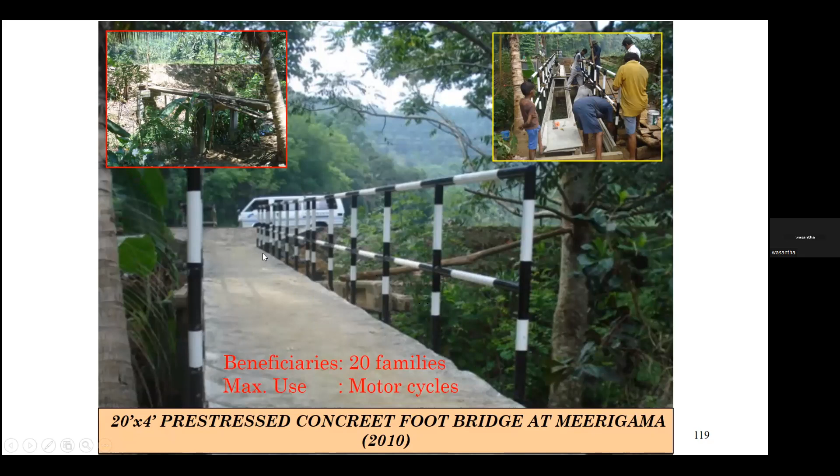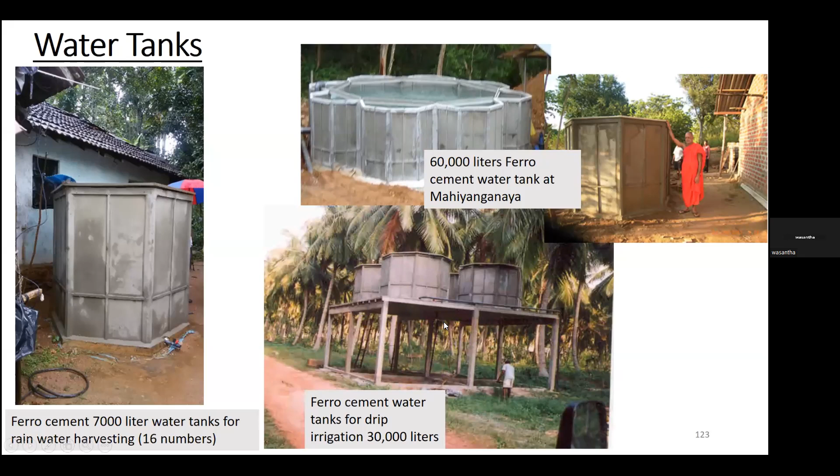We also have ferrocement toilet technology. These panels are half-inch thick, and these toilets are good for temporary locations, such as exhibitions, where you can assemble them. After the exhibition is completed, since they're connected with nuts and bolts, you can remove them and fix them at another place. These toilets are very cheap.

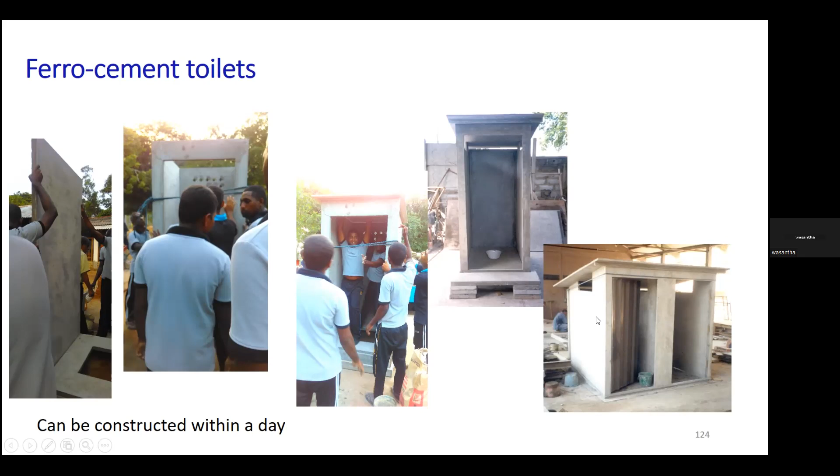And this is the end of the presentation. If you have any clarification, you can raise it now.

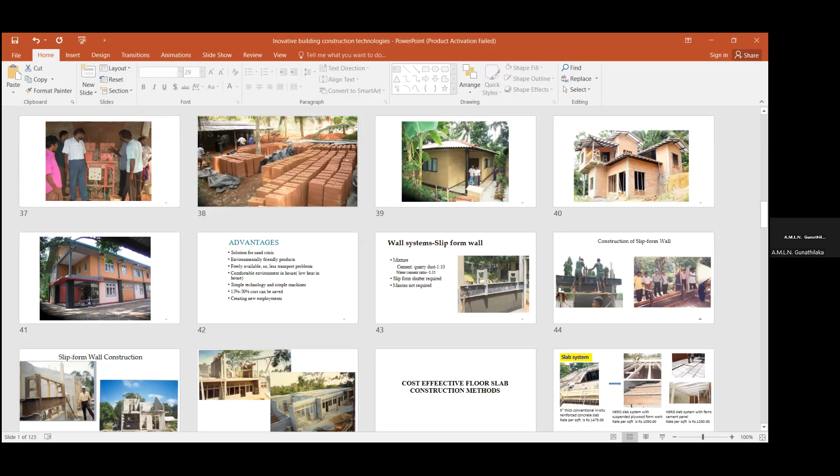I think you have done all the design checks, and it's better if you can share that particular article. I believe there was a site where you checked the stresses and all these things, it will be useful maybe for the students. Can you show that site again? I believe, Mr. Wasantha, it's maybe a good thing. Which slide was it?

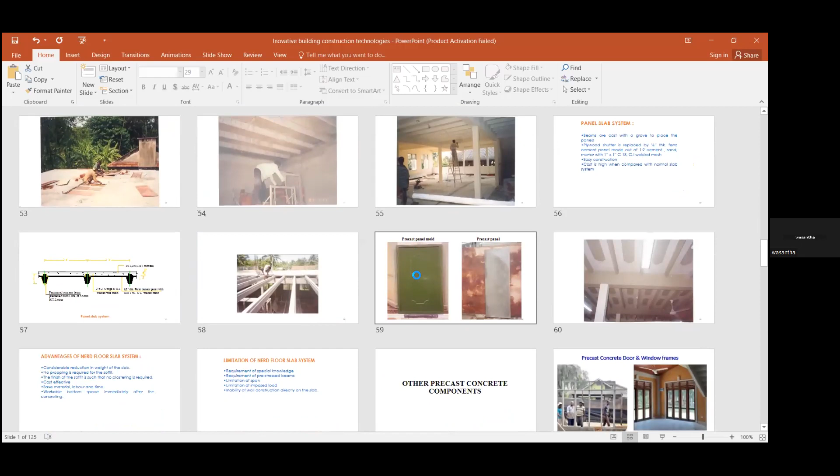Where it says about the stresses under pre-stressing condition, this is for the post-tension masonry one. Yes, this one, correct.

This basically shows you have effectively used the pre-stressing technology to resist the lateral force. I think it's a good, interesting design. This pre-stress retaining wall and post-tension retaining wall are both my own projects.

I have published research papers for both these technologies at the Kandy conference. I think it's a very interesting technology.

I think you have done field testing also, checking the deflection and all these things. I believe I have shown you a picture. If somebody is interested, I can give you the full details.

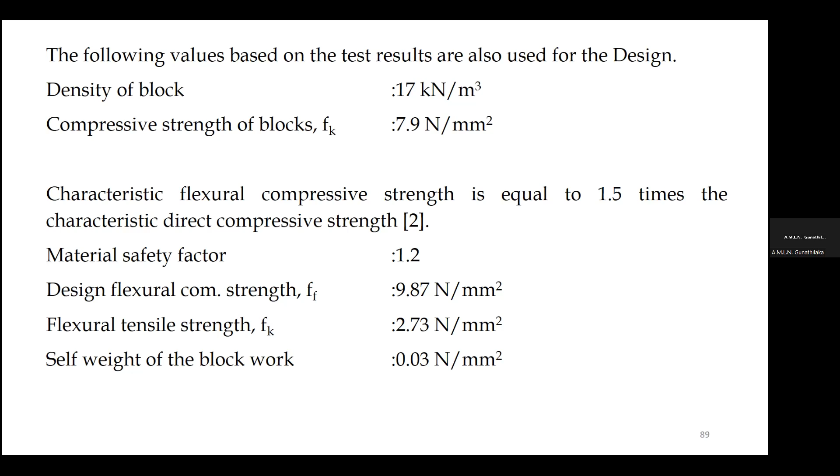Mr. Wasantha, can you hear us? I think you have disconnected. I can't hear from you. Can you hear me? What about the other audience? Can you hear us? Hello, can you hear us? Is there any problem with the network?

I believe Mr. Wasantha has maybe disconnected, maybe due to a connection issue, but we'll see whether he can rejoin us. Otherwise, we may have to wind up the session. Maybe Mr. Wasantha is having a technical issue. We'll see in a few minutes.

Anyway, I think he has done a very informative presentation. I believe Mr. Wasantha may be having a problem with his connection, most probably due to the weather conditions prevailing these days. I would like to thank Mr. Wasantha Pereira who shared his knowledge with us. He did a very informative presentation regarding the technologies developed by NERD.

I think we can learn a lot from those technologies, especially for our students, maybe for their final year projects, especially for civil students. I believe they will definitely take some positives out of this presentation.